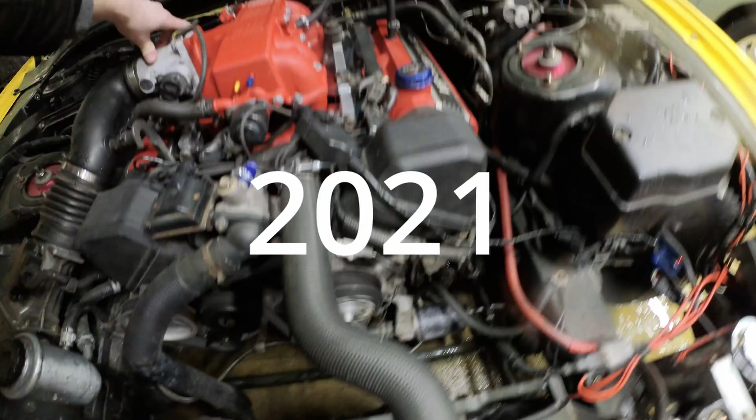Today I'll be installing this little sensor right here. This one little sensor could save my engine from catastrophic failure like I did last year. So let me show you how I'm going to install this.

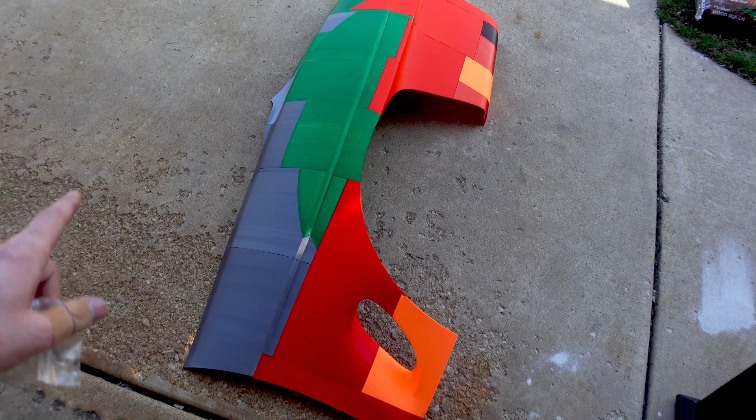Before we get started, got a little update on the wide body. Obviously, I'm printing my own wide body. If you haven't seen it already, check it out. So I have one piece printed, starting to print the front fender for the driver's side now, but that's not what I want to tell you.

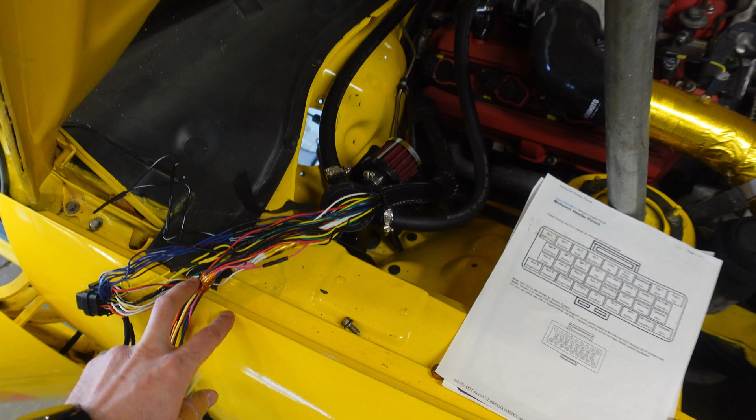So as you can see, I already got a mess going. This is my Wire Shop engine harness. Obviously I have it pulled out. I have it disconnected from the ECU. I have it pulled into the engine bay here so I don't have to be crouched over in the passenger side and the footwell over there. But you can see I have all the tape taken off.

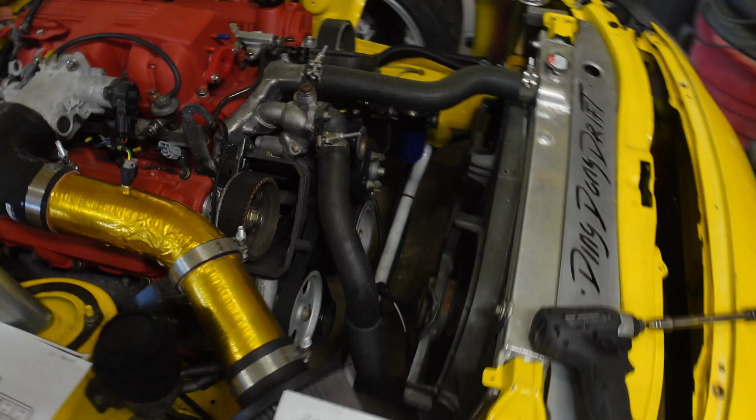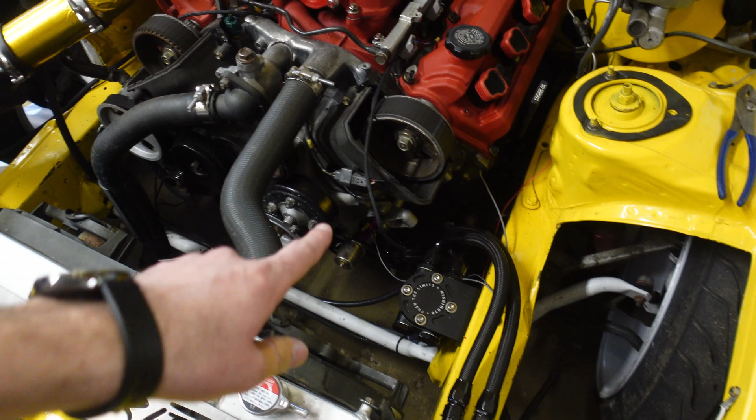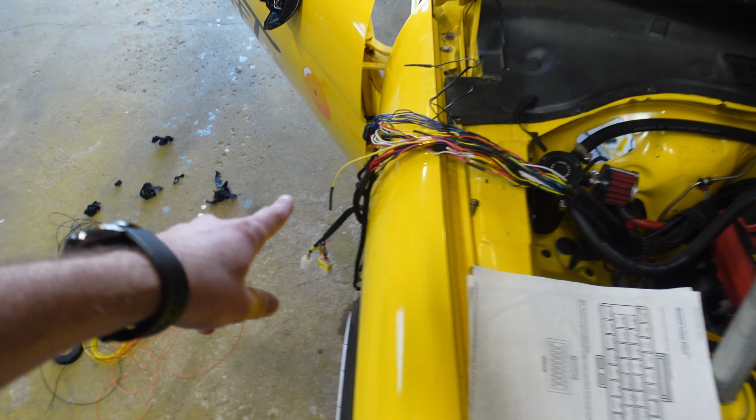I have the shielding pushed back, and I am now taking this wire, which is the oil pressure switch light that I've been using as an analog oil pressure. So wires right here. This wire used to be down there, and obviously I pulled it out from under the intake. What I'm gonna do is attach two of those wires. Those are brand new Tefzel wires. I'm gonna attach two of them and run them through that shielding and all the way to the ECU plug, because those need to go into the AN Volt 2.

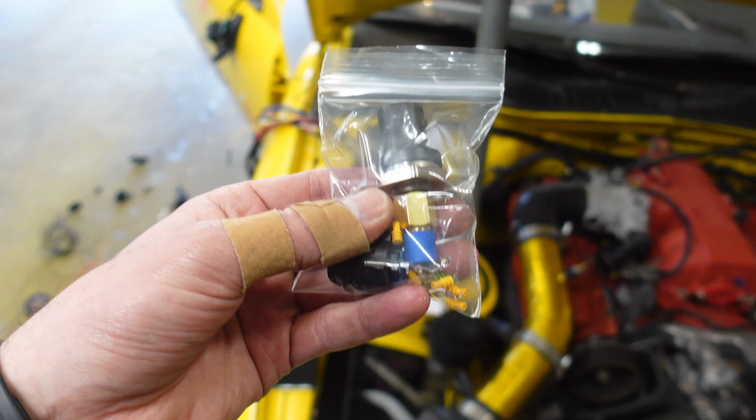The reason I need two wires, not one, is because this is an oil pressure and oil temperature combo sensor. I got a little adapter. The sensor's M10, and my port there is 1/8 inch NPT. Let's get these wires run through.

I'm gonna have to splice in 5 volts from some of the other sensors. So I'm thinking I'm gonna take 5 volts from the TPS, because that's literally the only other 5 volt sensor here, I think. I'm pretty sure that's the only one, because you see it's got the pink wire. And if we look here, my pink wire right there goes to 5 volts. So pink wire is 5 volts, and I'm pretty sure it's the same color everywhere.

So if you look here, these are my ignition and injection wires, and if we follow them, you can see they're spliced together because obviously it's a V8, but this only has 4 drivers for injection and ignition. However, when I upgrade the ECU, I literally just cut these splices, extend the wires to the plug, and boom, I have sequential injection and ignition.

I'm happy I tore this apart because it's awesome to see how easy it is gonna be to upgrade the ECU in the future. So shout out to Rob at My Wire Shop. His engine harnesses are freaking awesome. I'm so happy with this.

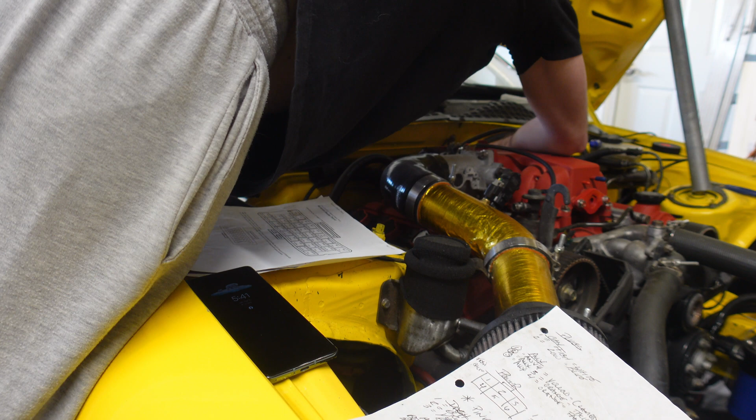So I'm running into a bit of an issue. There's this big joint here, splits the whole loom. I mean, the whole loom comes together in that spot right there. It's obviously pretty tight because there's like 100 wires in there. And there's a nice piece of heat shrink on it, and I don't wanna cut that piece of heat shrink, but I think I'm gonna have to because it's stuck there and it's not moving.

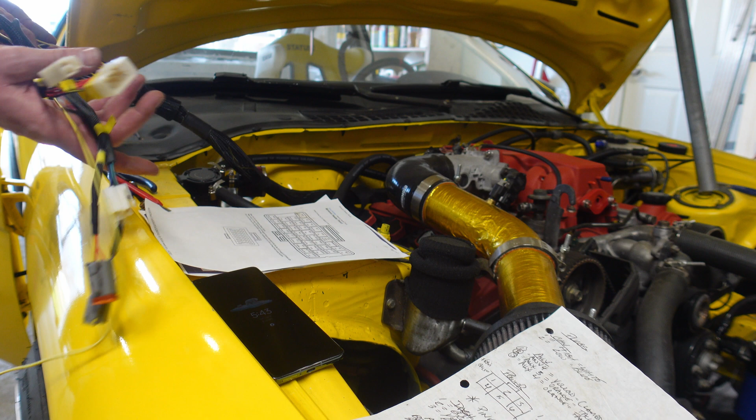So I think I'm gonna just cut the heat shrink, and then the heat shrink should be big enough that I can put a new one on there. I have some heat shrink that's pretty big. It's meant for like batteries. It looks so nice in there, and I didn't want to cut it, but I'm gonna have to. Oh yeah, there we go. So I cut tape, I cut the heat shrink. Rob, if you're watching, I'm so sorry.

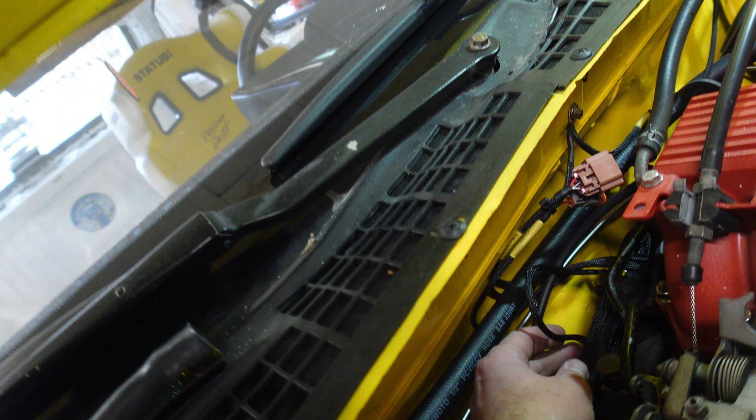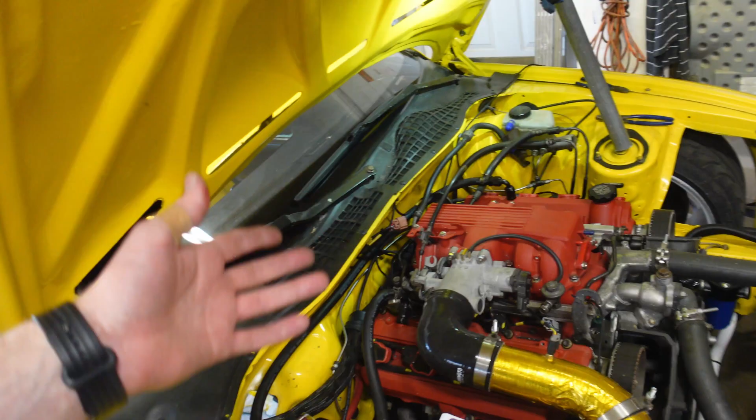All right, next step. So you see I have the TPS disconnected right here so I could have a little bit more slack. This is the TPS wire right here. So what I'm gonna do is cut the shielding right here and splice 2 more wires, 5-volt power and the sensor ground. I can't film any of this because I can barely see anything in there, so I'll just update when I have the wires run or spliced. All right, here's the wires. Got the shielding all cut.

I tried to strip the wires, just the shielding back, and then try to crimp it on, but I kind of cut through the wires, so then I just said, fuck it. All right, there we go.

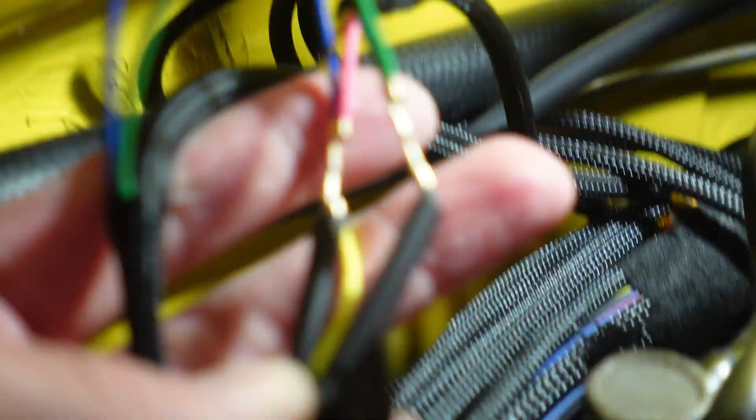As you can see over there, we got 4 wires, power, ground, the 2 signals, and then this is that loom over there. See that when I move it? And I got the 2 wires poked out, and then got a heat shrink on here. There's the power and ground coming from the ECU, if it would focus, and got those spliced in.

So now all I gotta do is slide those over, and this is like marine grade heat shrink that has like glue inside, and it becomes really nice and stiff so that these joints don't bend, so we don't have any issues with wires breaking or anything. So that's all done. This is the heat shrink I was talking about.

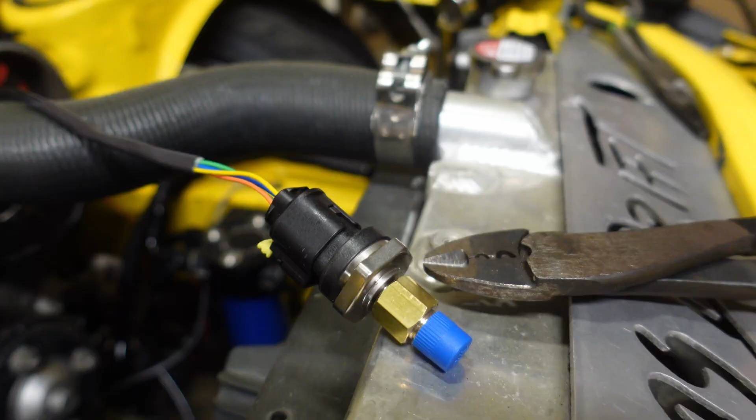All right, you saw me wire this guy up, figured out how to make this plug. I've never made a Bosch plug like this before. Basically, the gist of it is this little blue thing, you push it up and you can push the pins in, and then you push it down to lock the pins so they don't come out. So it's not like little clips on like Deutsch connectors that you need to use like a little pin tool to unpin. It's a little slidey clip thing.

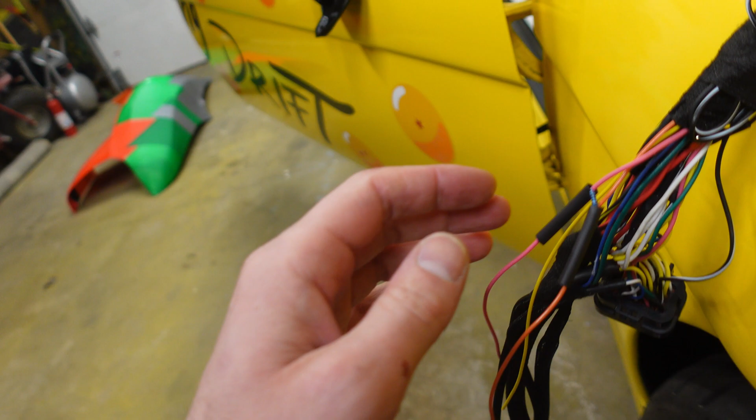So now what I'm doing is installing a pull-up resistor. So this is a spare 5-volt wire that Rob has installed. You see the main 5-volt wire is this pink one right here. So somewhere in here, it splits off. It comes back forward this way so you can add other sensors or something.

A pull-up resistor basically takes 5 volts through a 1 kilo ohm resistor, converts, I don't know exactly how it works, but I think the temperature sensor that's in there outputs like a 3-volt signal. So you need to add a couple volts to it, I think.

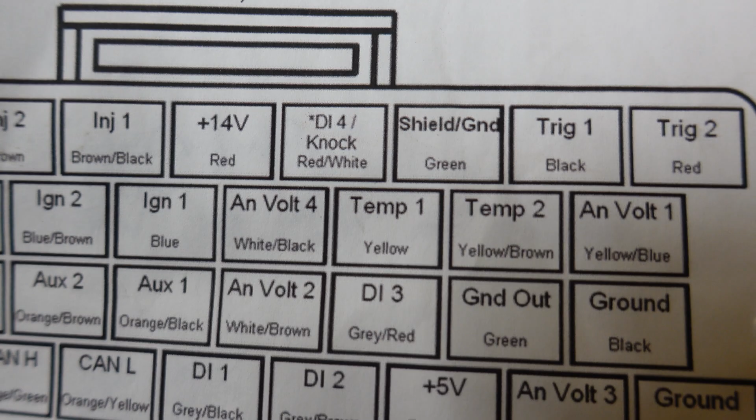So my 2 temperature pins, see, temp 1 is intake air temperature and temp 2 is coolant. So there's 1 and there's 2. So my 2 temperature pins are taken already. So what I have to use is my analog voltage ones.

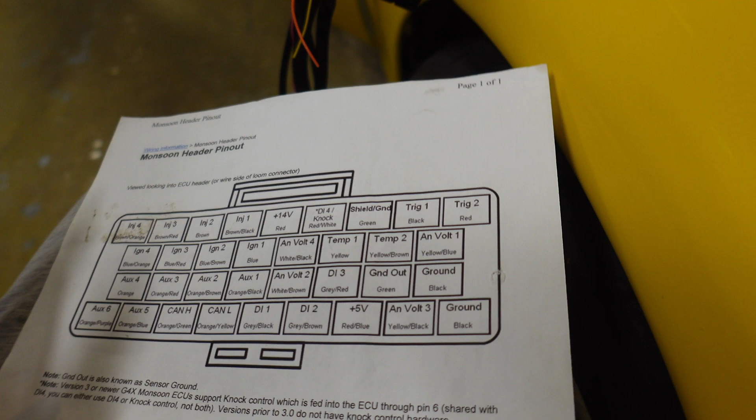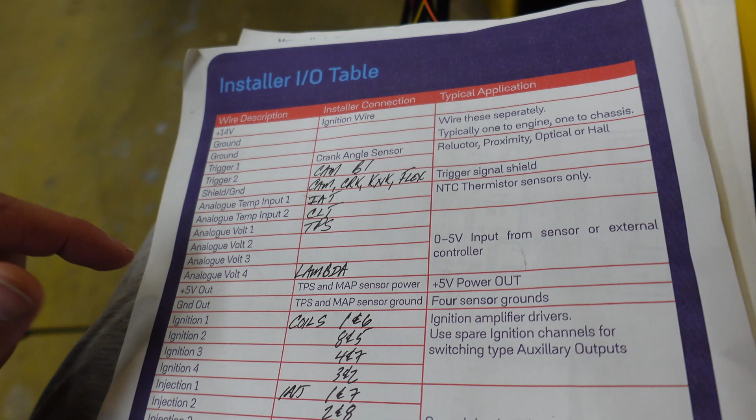So if we look here, my analog voltage 1 is my TPS, and my analog voltage 4 is my lambda, which is my wideband. But I still have 2 and 3. 2 is gonna be my oil temperature, and 3 is gonna be my oil pressure. Pressure does not need to have a pull-up resistor added, but temperature does.

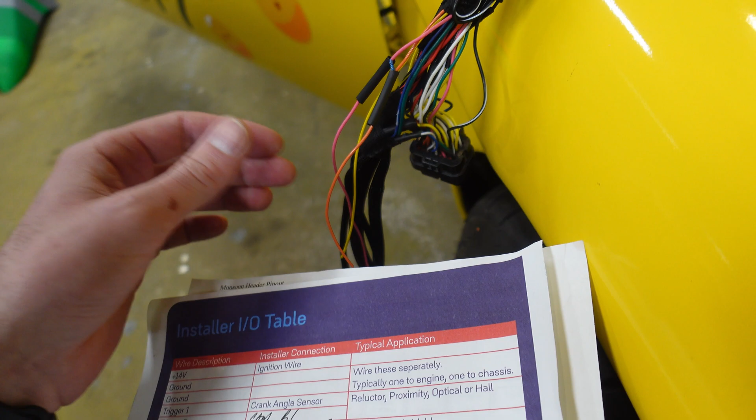The last thing I'm gonna do now is I'm putting this heat shrink on it, and then I'm gonna put 1 more heat shrink over all of this resistor, because these little tiny legs on the resistor, I don't wanna break them. Pull the shielding back on the wires, and then wrap the legs of the resistor around it, and crimped on those little gold crimps. I hope this works because I've never done this.

This is fun. I like wiring. I like wiring when you have a nice new harness. So shout out to my wire shop once again for an awesome engine harness.

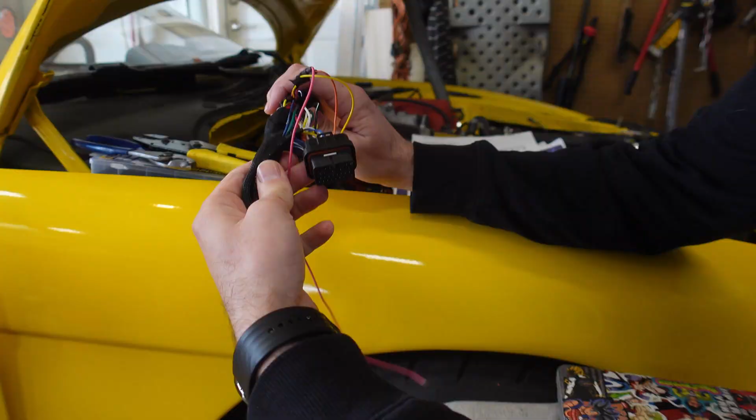Got everything finished up, pull-up resistor in here, and I got the 2 new wires pinned into the ECU. This plug, the way you insert pins, is you push this pin down and it unlocks the whole plug. Be careful you don't pull any wires out. And then you push your pins in, and then you push these back up and it locks the pins in place.

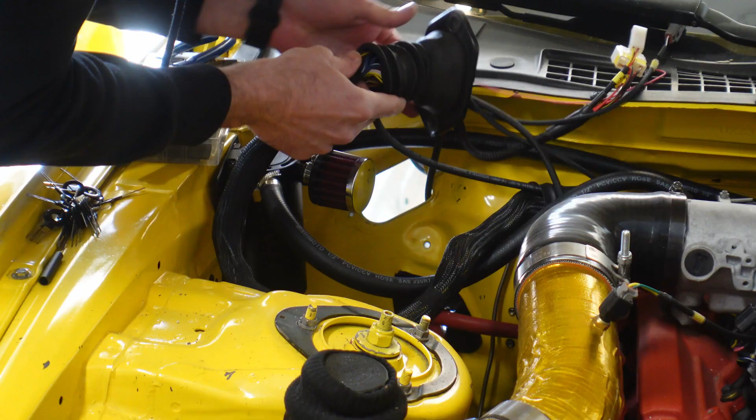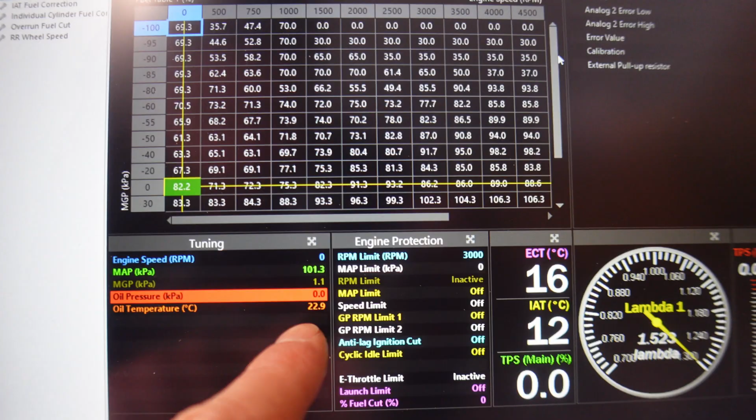Sorry if you can hear all that noise of cutting trees down or something in my neighborhood. But I got everything working. You can see we have oil pressure is 0, but look, if I put this little thingy in my mouth.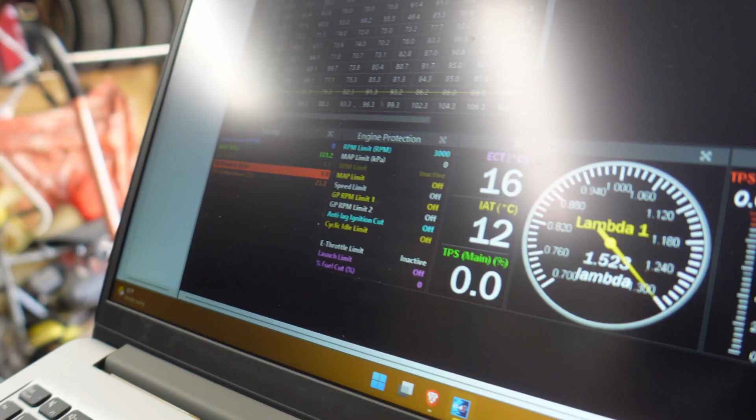And blow on it real hard. Why are you gay? Like really, really hard. You saw that? It goes up. And then oil temperature as well. See if I hold it. It's going up. Hell yeah.

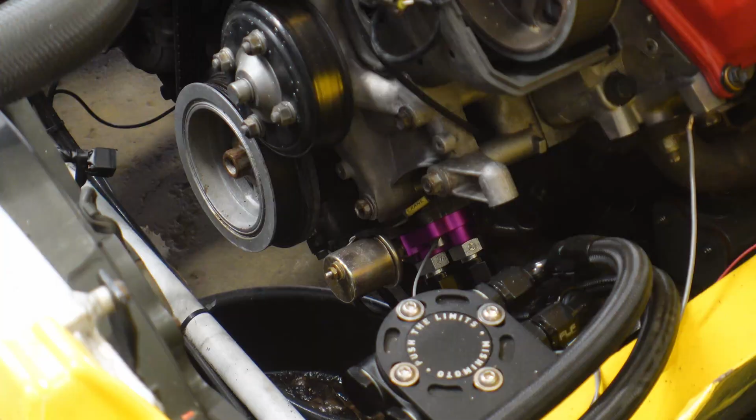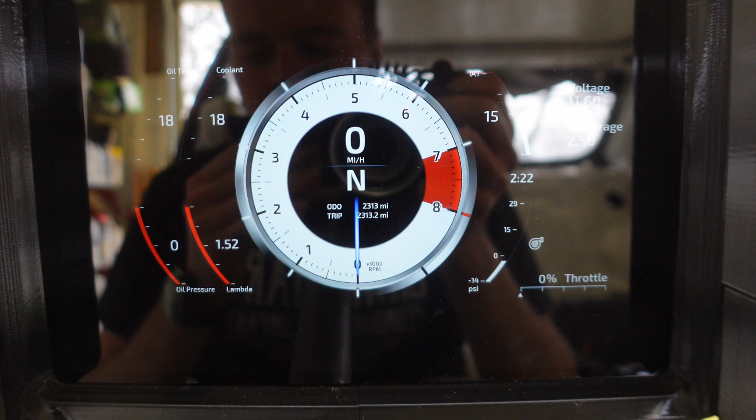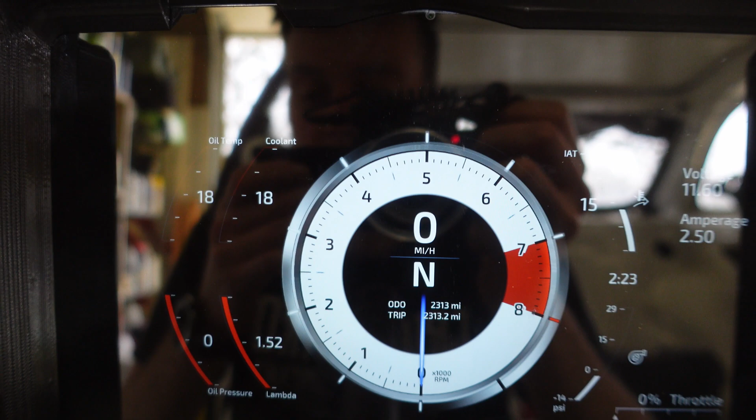All right. Sorry I didn't film this, but as you can see, I got the whole dash. Everything added. So I got oil temperature and coolant at the top, got oil pressure and wideband at the bottom, and then those are still the same. Let's see if it works and make sure we don't have any leaks. It's good that the coolant and oil temperature are the same because the car hasn't run yet. So let's see what happens.

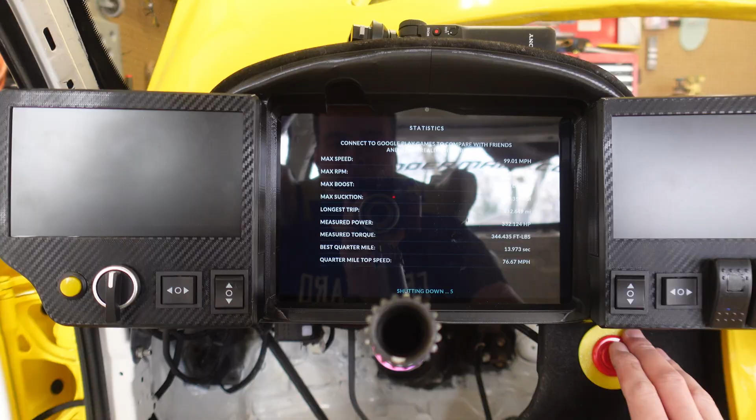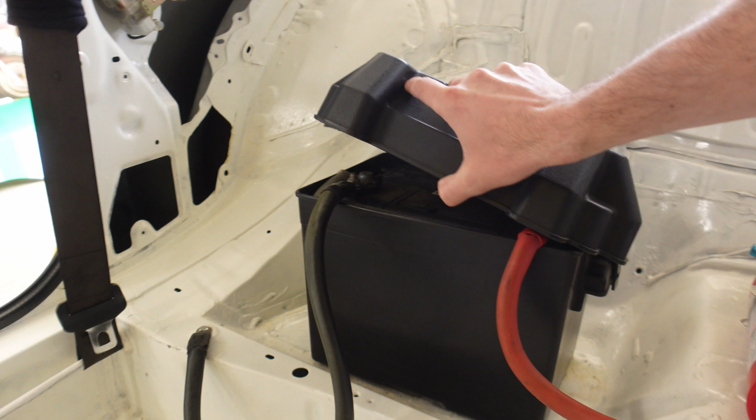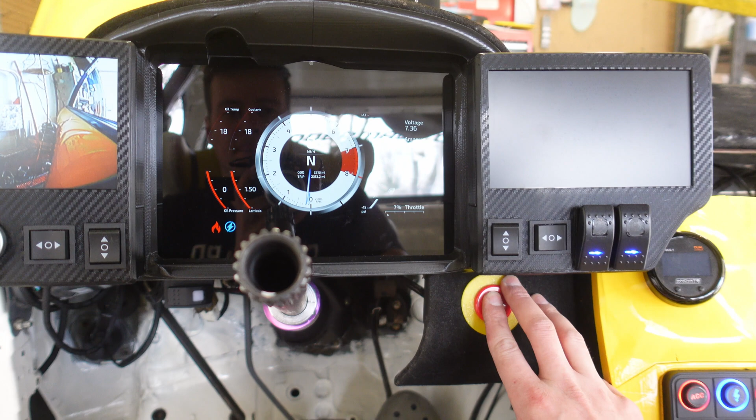Why did that just happen? All right, so the issue was I had this like shitty battery terminal on the ground, and it was so old and corroded that it wouldn't even crank. So got that fixed. I'm gonna start the car. We're gonna see what happens. There we go.

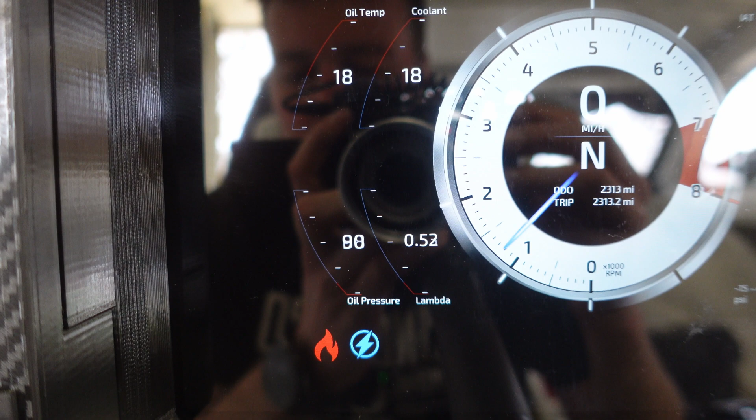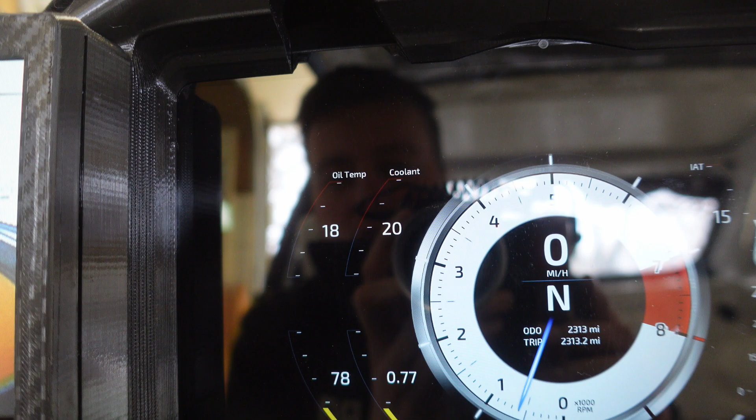We got good oil pressure. So now we can watch the coolant and oil temp. So oil should obviously heat up slower because it's thicker. So now I can mess with the scales here. See how, like Lambda, yeah, it's rich right now, which is fine.

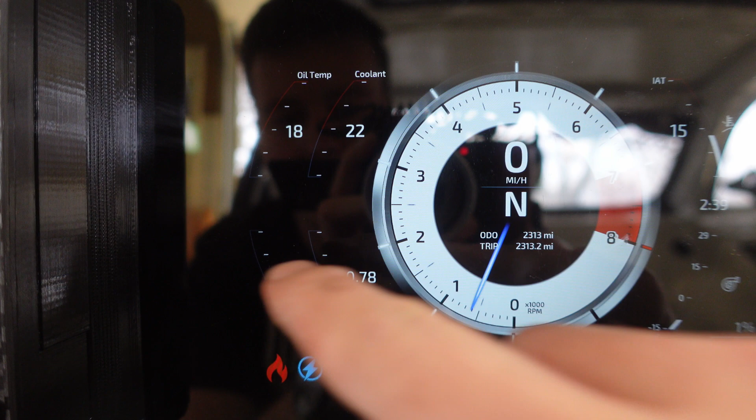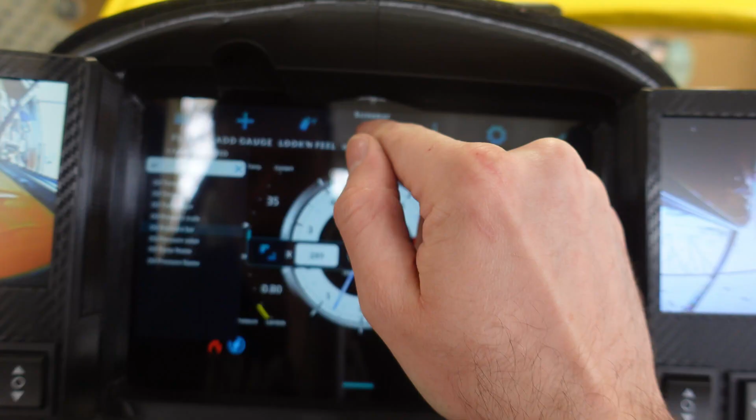But this one needs to go like up here. So I need to change the ranges for that. Just super easy to do. Just go into edit. And then we're gonna do oil pressure bar, input and values. Lambda.

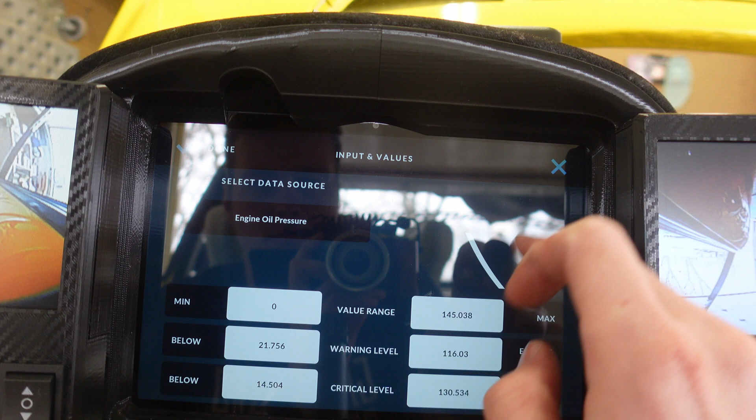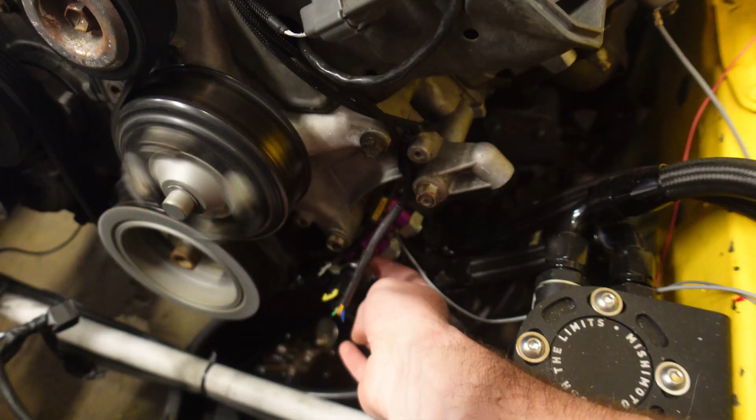Oh, that should work. Oh, there we go. Okay, cool. But yeah, look. Oil pressure's good. No leaks. Everything's dry. Yeah, everything's perfectly dry.

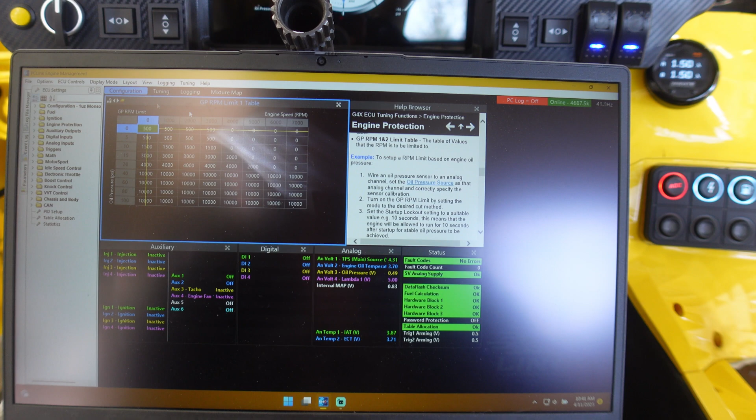That's freaking legit. So I just realized I didn't show actually how I set up the oil sensors and all that stuff, and how I set up the engine protection. So let's start with the oil sensors. Analog input, oil pressure. That opens this menu here. You just pick which input you put your wire in.

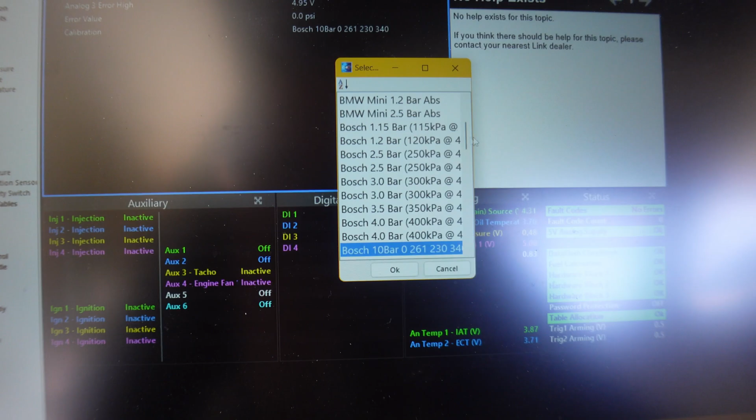So I have analog volt 3 for my oil pressure. It's a Bosch 10 bar. It's got the part number right there. So there's all these sensors in here that are built in. Pressure's done, that works. Oil temperature, and I'm using analog volt 2. Now this is where the resistor that I added comes in. So you see external pull-up resistor.

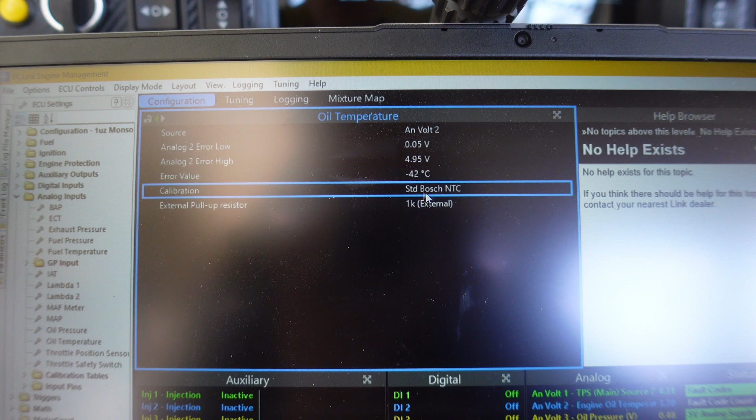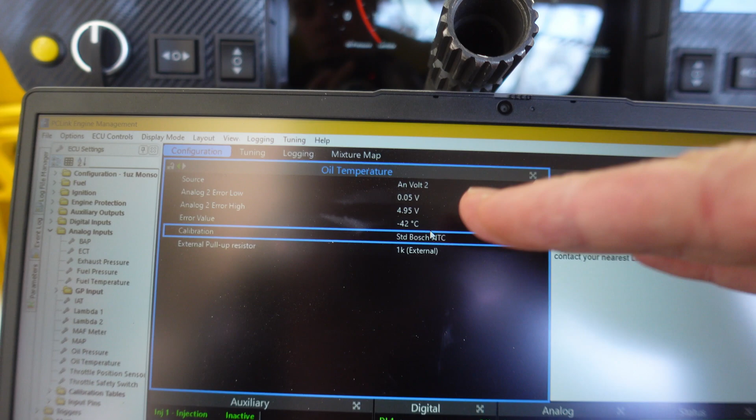Because I'm using temperature, Link software already knows that I need a pull-up resistor because temperature sensors use resistance instead of an actual voltage they put out. That's why you need the pull-up resistor. You're basically adding 5 volts to the resistance that sensor is putting out. So the sensor is putting out resistance, and at very cold temperatures it's high resistance, and at very hot temperatures it's low resistance.

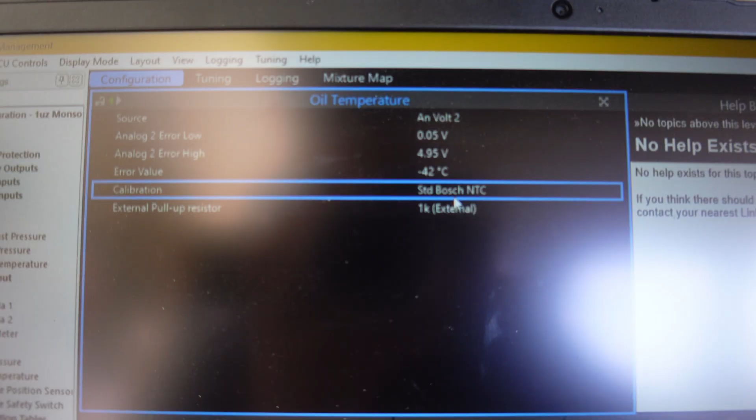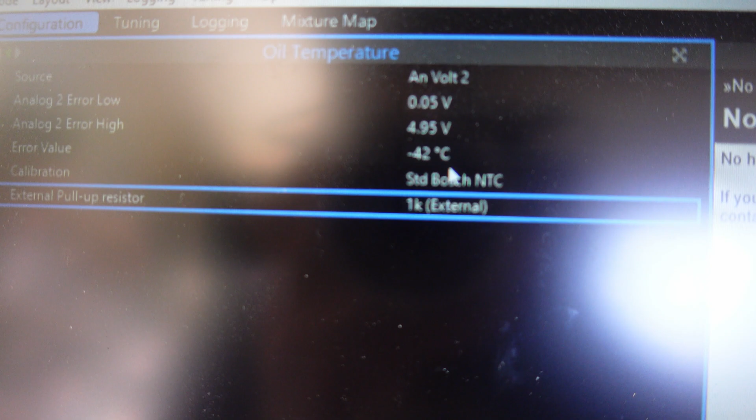And if you combine that with the 5 volts coming off of the resistor that I added, then you can base that off of it. So it's just a standard Bosch NTC. I put a 1K resistor on there. That's why the resistor doesn't really matter, because you can go in here and you can choose what resistance you want to use. And yeah, I put in some crazy value for error. So if I ever see negative 42 on my oil temperature, that means my sensor has failed.

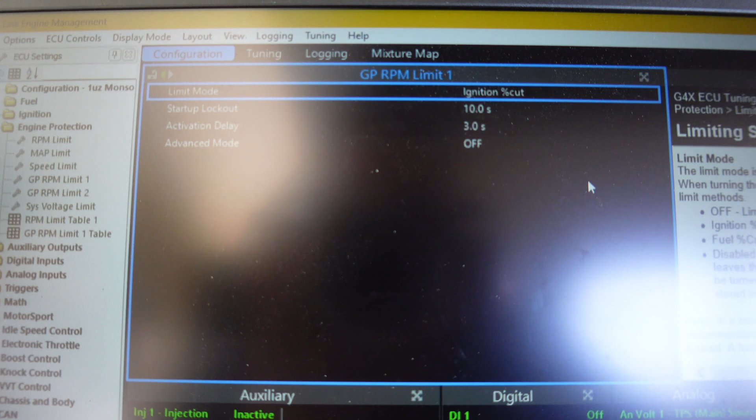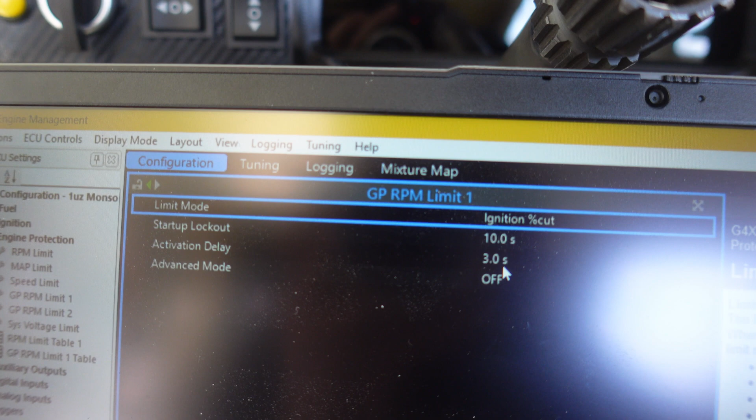For the engine protection for oil pressure, we go to engine protection and GP RPM limit 1, and then we choose ignition cut. You can do fuel cut if you want, but I think ignition cut works better because you can just keep dumping fuel and not lean the engine out. And then we have the startup lockout. So this is like when you're starting the engine, it's building oil pressure. I mean, mine builds oil pressure like instantly. And then the activation delay is like, say, you hit 20 PSI for some weird reason, it doesn't just instantly cut power, it will wait 3 seconds.

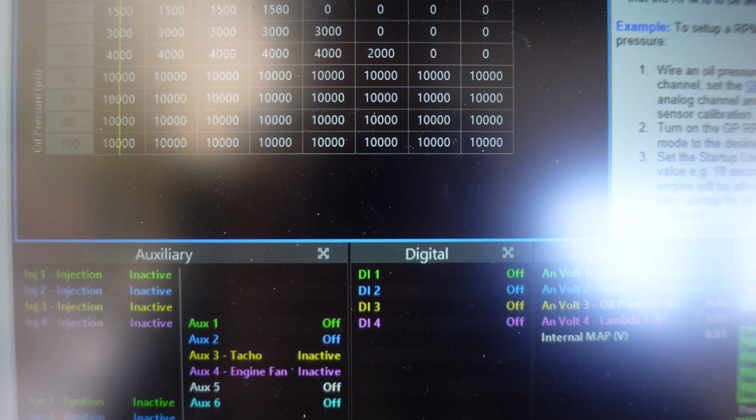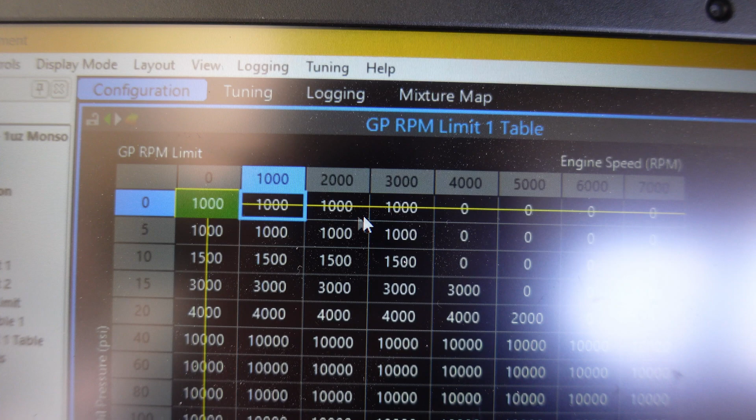We go to GP RPM limit table 1, and this is where you set up all your RPMs. So I just realized I actually have to raise these because my car doesn't even idle at 500. I have to raise these to 1,000. This is very simple. So at 0 oil pressure and at 0 RPM, the ECU will allow 1,000 RPM. And at 1,000 RPM at 0, basically if your engine's failed, it will still allow you to rev it to 1,000. So you can break your engine more, but it won't let you go above that. So that's how this works.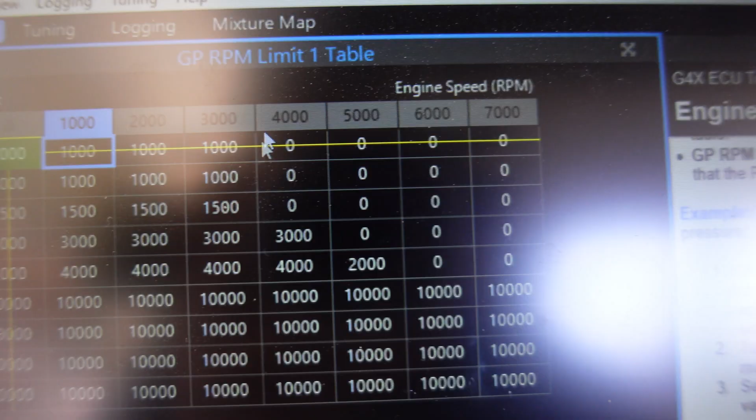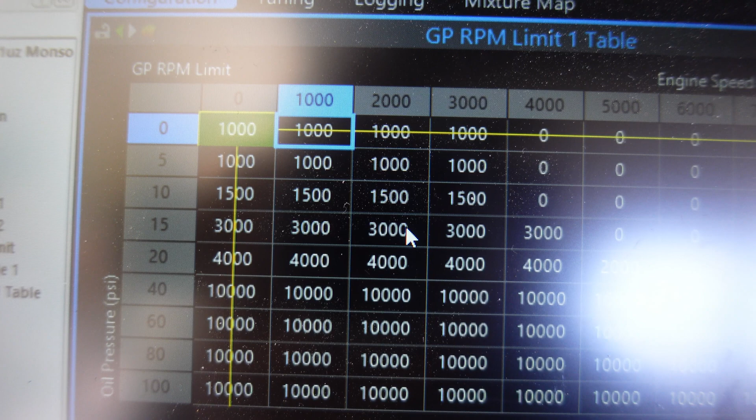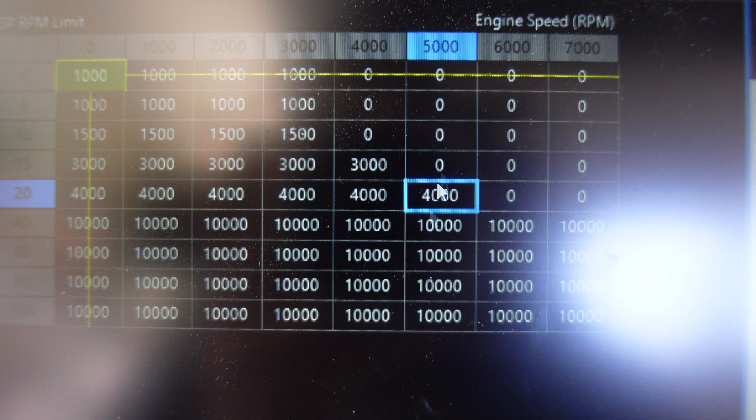At 5 PSI oil pressure, it won't let you go above 4,000 either. At 10, you can rev to 1,500, because then you could see maybe at high RPMs, you're getting oil pressure. And then at 40 PSI, which is kind of decent oil pressure for a 1UZ, it'll let you rev to infinity. So you don't want the oil pressure limit to affect your other limits. So my engine has its actual RPM limit, which is here. This is my actual RPM limit.

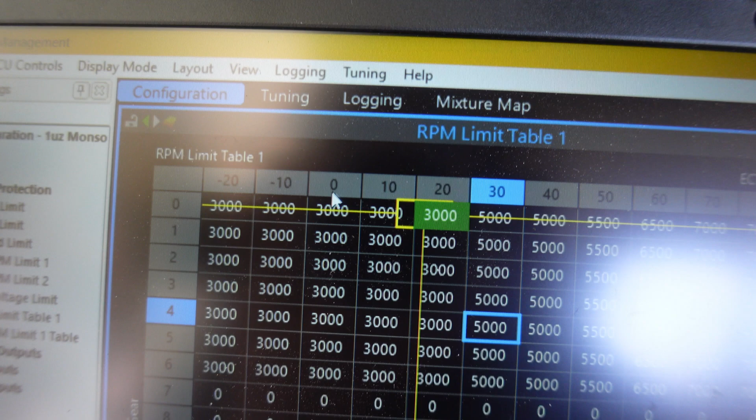You have coolant temperature, and as the temperature rises, it will let you rev to a higher RPM. So mine's at 7,000 right now. I used to rev to 7,500, but it gets scary up there. I don't know. So yeah, that's how you set up the engine protection. It's pretty simple.